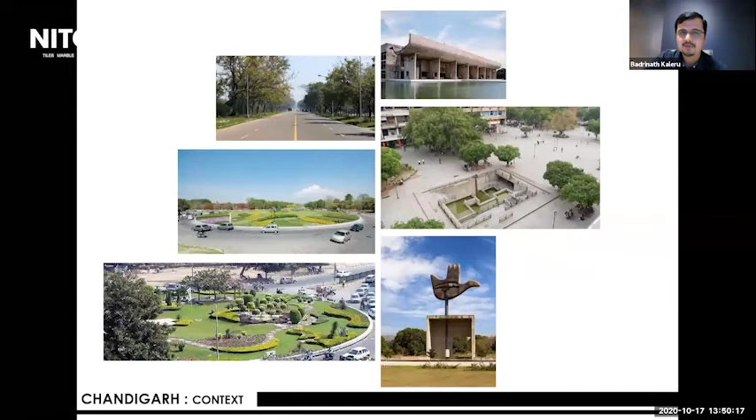So I'll just quickly flip to a couple of projects. This is a project in Chandigarh, it faces one of the predominant green belts. The whole idea was that the client actually bought the piece of land wherein he could look at different kinds of green belts around it, and fortunately there are 3-4 different parks around it.

So the site was located in such a way that they don't have neighbors, they have privacy from neighbors. So they wanted it to behave in a certain way that it's an extrovert house, not a standard urban introvert house. So it opens more towards outside than it contains itself.

One of the interesting discussions was they wanted a terrace, because the cityscape of Chandigarh is dominated by treetops, thanks to the great architect who did it. So he actually said that the best place to see the city should be from a certain height where we could see most of it and appreciate the greenery. So at that particular level, if we could have a terrace, that could be the main element of the house, and everything could be spaced around it.

There is some problem, I think it's moving.

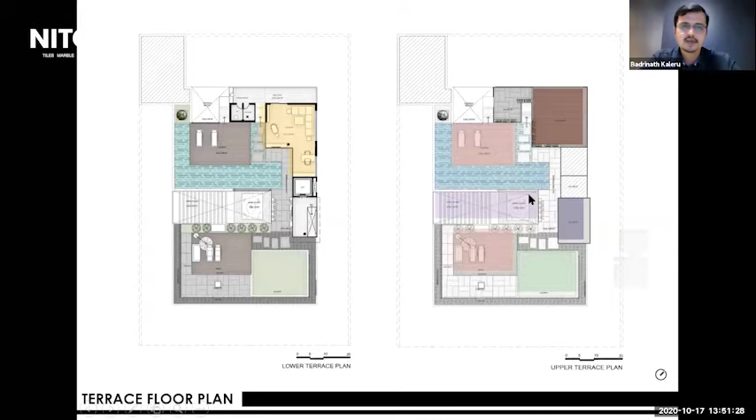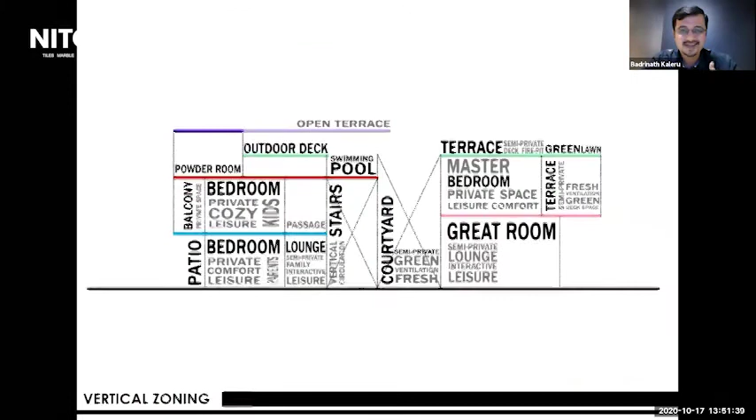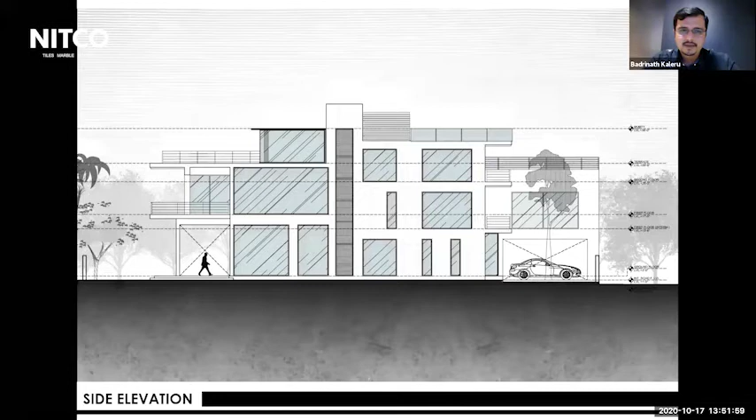So these are like how we could see that in most of the views, you could see how it looks towards outside. This is their existing trees in the backyard, with existing mature trees.

So how it blends into it, and how it brings in light and spaces, even private spaces like closet areas, have diffusion in it, and how they blend into each other. So if we only talk about the contextuality, it was more about making use of what is there in the neighborhood and trying to draw inspiration and evolve around it.

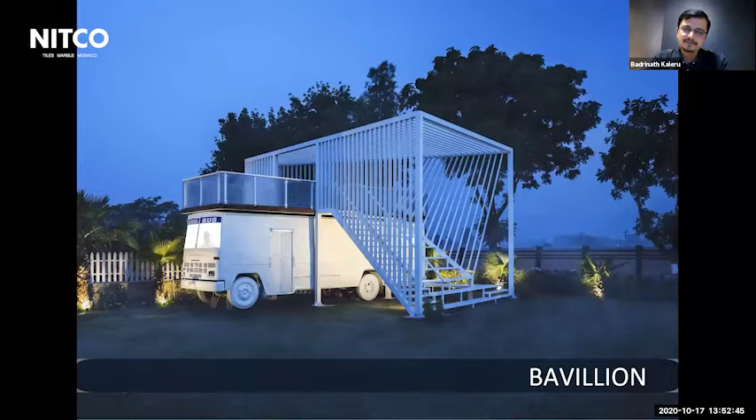There's another project I want to talk about. Normally we get briefs of different kinds, and sometimes briefs need not be programmatic, they can even be emotional.

This was an emotional brief, about a person who migrated from Chandigarh and shifted into a very remote village. He started a school 40 years ago, and 20 years after starting it, it was a time where they wanted to expand into the further neighborhood, where they had to bring in transport vehicles.

That is when his unfulfilled vision was left unfulfilled, as he passed away, and his daughter took over the school. Based on his insurance money, once he left, they bought their first bus. Today they have a fleet of around 100 buses and more than 4,000 students.

But even the first bus, which was purchased way back, they didn't want to send it for the mandatory disposal. They wanted it to have a good afterlife, something they could give back to the school.

It all started because we've been doing quite a lot of projects, and this was more of an emotional brief they gave us. We said, okay, let us do something which is peaceful, and it could bring back the vision, and it would be part of your school that could look back to it.

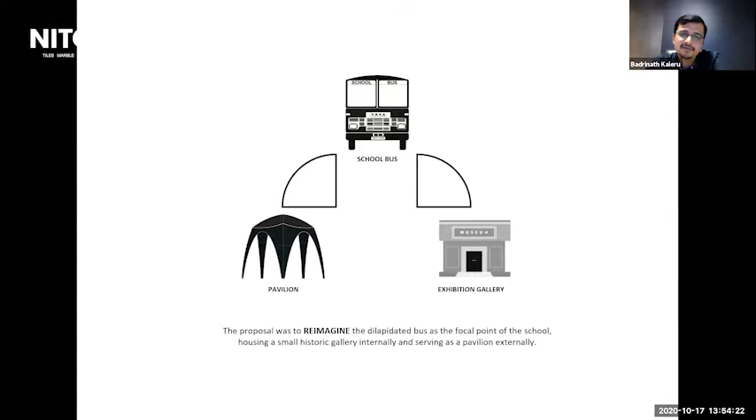So the idea was to convert the bus into a pavilion and museum gallery for the school, and how we could make them coexist so that we don't lose the originality of the bus, while at the same time using it for a broader purpose.

When we were working on the concept, we tried to encase it in a certain way, but we just wanted to keep the bus as the original. Also, the idea was associated with a bus from childhood, it was always an emotion that standing on top of a bus would be every child's dream.

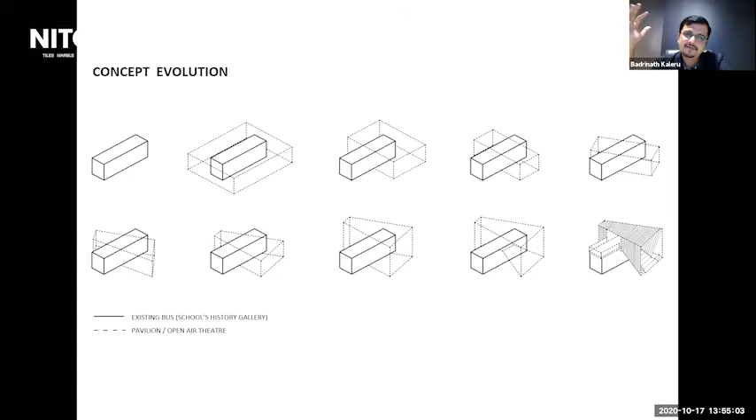It was set in a lawn, a very nice area where the neighborhood was lush green, with fields and everything, but they could not access it visually because of the high boundary walls and security issues. So this nice lift of around 10-12 feet would give you that horizon, a place where you could look beyond a standard perspective.

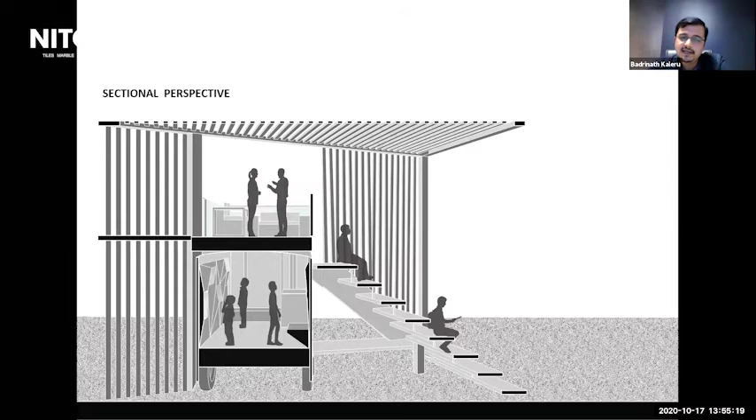So the afterlife of it was supposed to create a small open-air theater with a deck on top, and something inside which could be used more like an information center documenting the journey of the school. So it needed to be an open-air pavilion with a terrace and a knowledge center inside. The question was how could we expect so many things from a small bus, and what could be the possibilities?

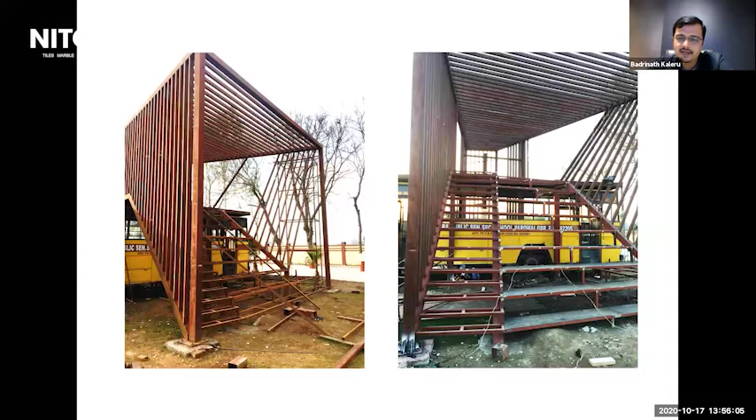The interesting part is the patterns it creates throughout the day - it looks very different at different times of the day, because the main element was the play of shadows, how they play into each other and interact.

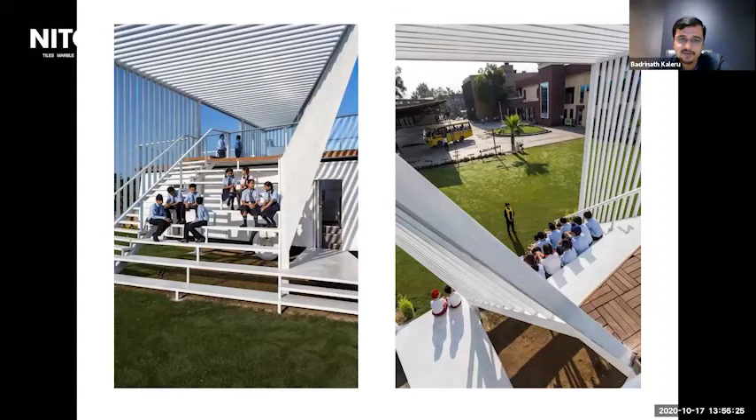The overall phenomenon was more like an open-air pavilion where students would actually want to go up. They spend most of their evenings there in a formal or informal way, and there are also a lot of formal things organized around it. There's a view where we could look through the horizon, something that goes beyond the boundaries, and how they make use of it.

So it's not something many people would relate to right away - they'd say it's a mere bus. But it was more about understanding the importance of it, and that's when we thought we could make something out of it.

It has been a phenomenal response - so many people have been visiting it, quite frequently. It's probably now the cover page image of the school. And even in this small environment, we still preserved the remnants of the bus driver's seat and the area next to it, so people could still relate it to what it was before.

I think that concludes my presentation. It is more about what we talk about as contextuality. The perspective here is that there could be different dimensions of perspective regarding contextuality, not just limited to the visual domain alone.

Love the presentation, Badri. So lucky to be living in a city like Chandigarh, where you have the trees and can step out on terraces and enjoy them. I love what you did with the bus - it was really super cool. I've never seen something like that before. Thank you. Use of a bus can be like this - we never thought something like this could be created from a bus. It's really wonderful, Badri. Thank you, Arunji.

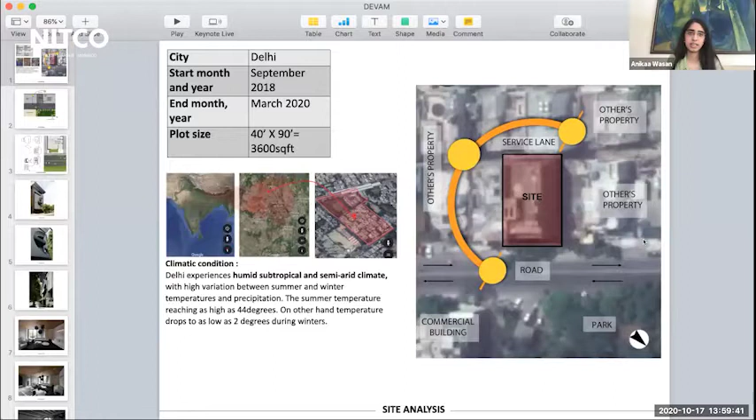I'm just presenting two of my projects. Is my screen visible? Yes, you are visible. Okay, so this is one of the residential projects in Delhi, in a densely populated area in Pitampura.

This is on a busy road, and we designed the shades that come out because of the context of the surroundings. Let me explain how I did this. The climate of Delhi touches extremes - in summers it goes up to 44, 45 degrees, and it drops down in winters to 2 degrees. So it's extreme conditions over here.

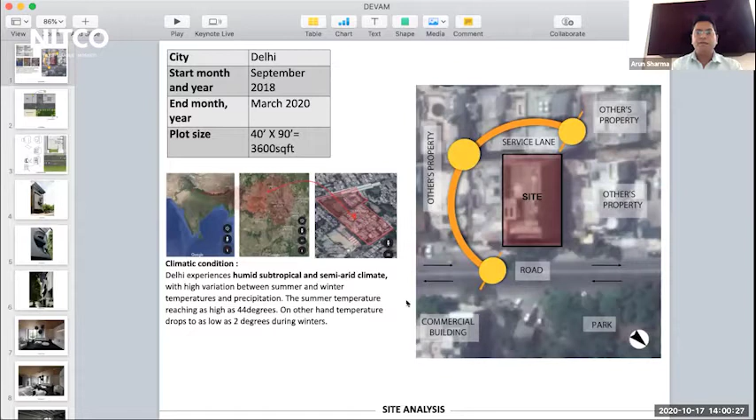This is the road, the busy road, and this is the site I was talking about, with residential property on both sides. Across the road there is a lush green park, and diagonally opposite there is a commercial building.

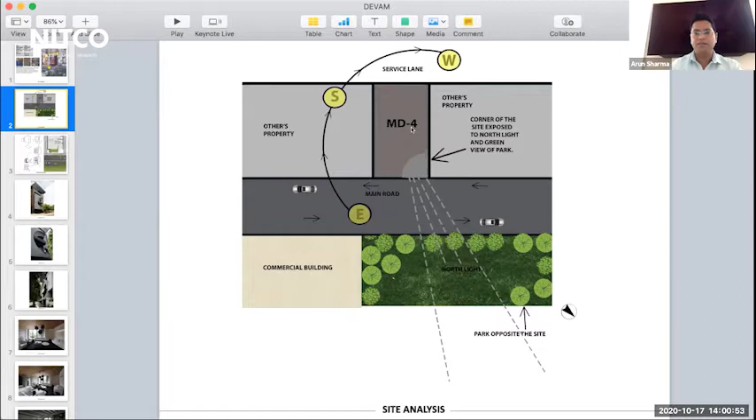The client and we didn't want to have the view of this commercial building from inside the interior areas. So what we did is create a thin partition wall in the balcony, and we tried to block the view of the commercial area so that we could have only the view of the green area from inside.

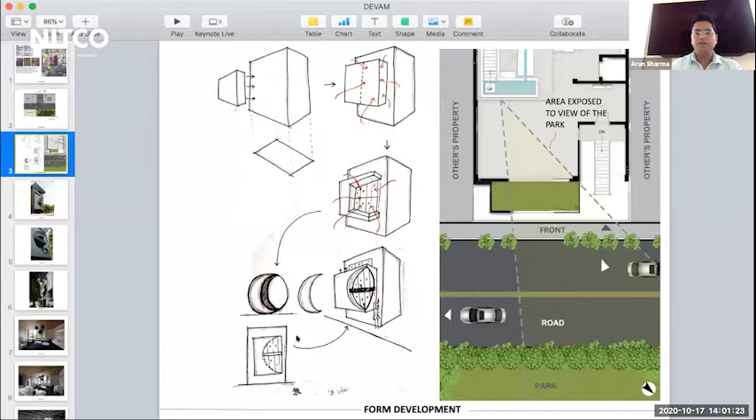In the starting, we blocked it out like this, and after joining these three points, we eventually came up with a curvilinear shape. This is how we arrived at this shape, and it came out like this - because of the requirement, and it came out beautifully. This is the second slide, you can see how the shapes came out.

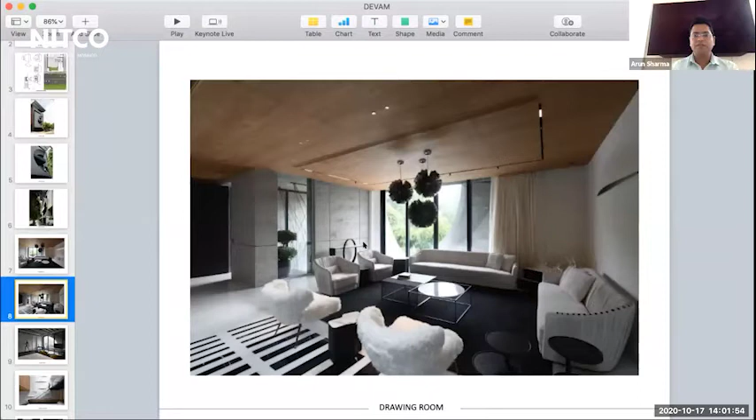From the inside also you can see the green area only, and not the commercial building across the road. So this is the formal sitting area, and from this area also you can see just the green part.

From inside the bedrooms also you have a beautiful view across the building. In the center, like we derived the curve shape for the front elevation, we took it all over the house. This curvilinear shape we took all around, on the wall, the same wall. So we extended the design in the formal sitting area, central atrium, bedroom, all over, the simple shape. This creates a very good harmony and a connect between the inside and outside.

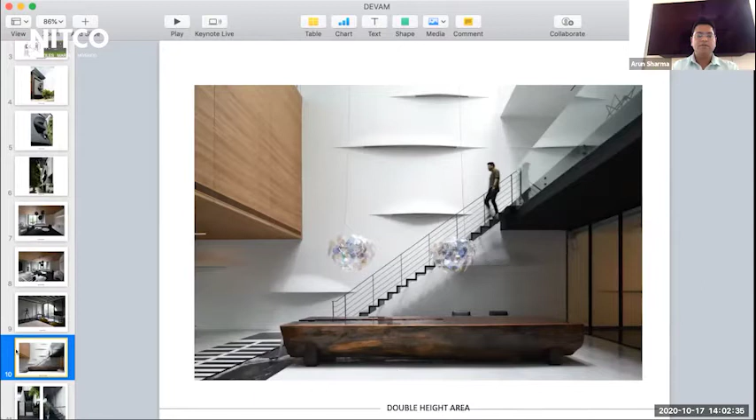This is the entrance of the Devam building. The name of the building is Devam, and this is an extended suspended staircase. In this we created direct entry, because on the left hand side, stilt is mandatory in Delhi. So the left hand side is for the car park and all, and we gave direct access to the upper ground floor from the stilt, from this staircase.

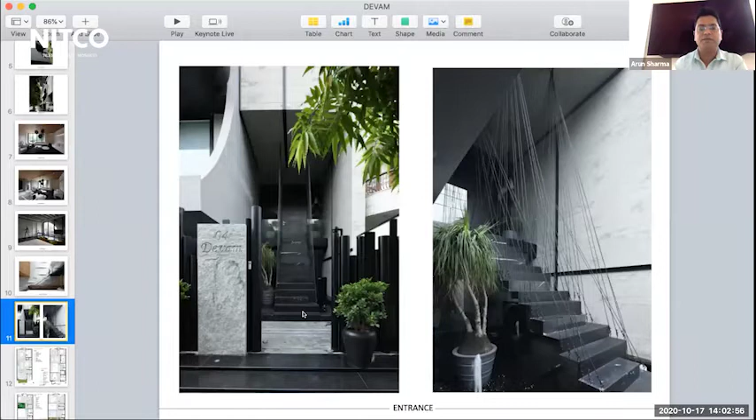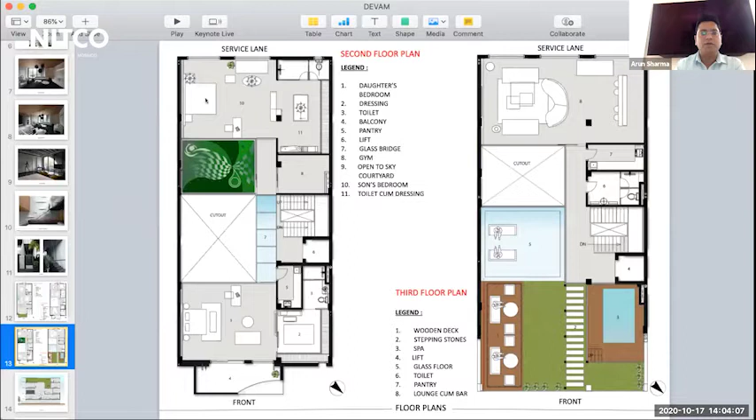The advantage we got from this is you can have the view from this bedroom of this courtyard. This courtyard serves two purposes: one, to have the view from this bedroom, and also because the cool air comes from the ground floor, upper ground floor area, and it goes up and exits through this courtyard. So it serves two purposes, creating a comparatively cool climate inside.

And you can see this curve shape we played with all over, which we took from the elevation block.

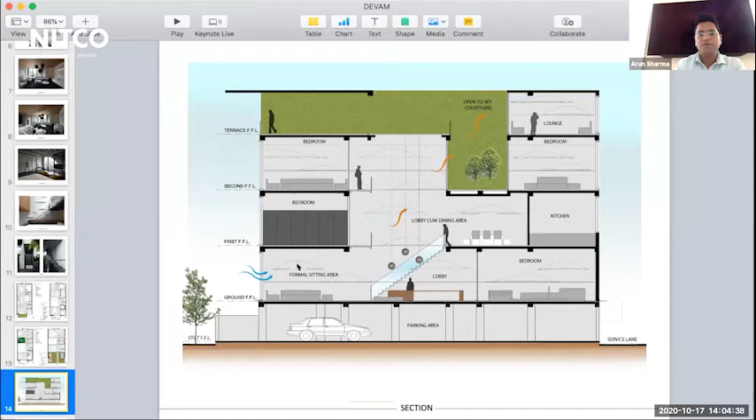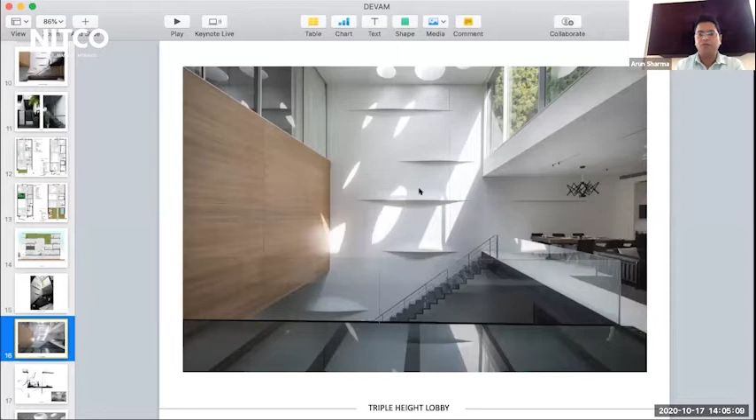These are a few pictures of the inside of the house, in which you can see that green courtyard I was talking about, and the whole area is flooded with natural light. There is no need to put on any artificial source of light anywhere in the house. We have ample natural light all over this house, although it is a property in between two residential plots. Still we have ample natural light from the skylights.

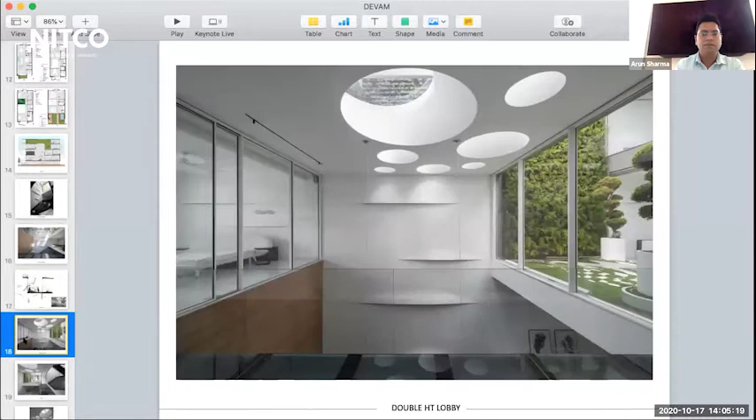This is the view we get from the rear bedroom. This is the view of the courtyard that we get from the rear bedroom. And this is the courtyard view.

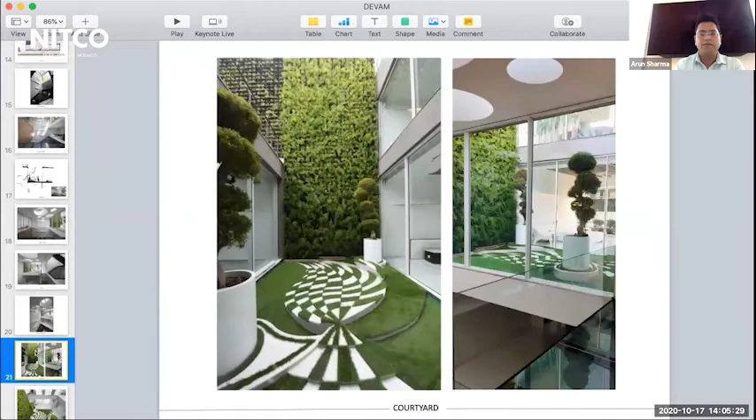From the rear side, this is the view from the rear side bedroom, which is at the back of the plot where the service lane is at the back, but still we can have a very good view of this courtyard. So you don't feel as if you're on the second floor with your room at the back side without any view of the green area. It entirely changes the scene of this bedroom.

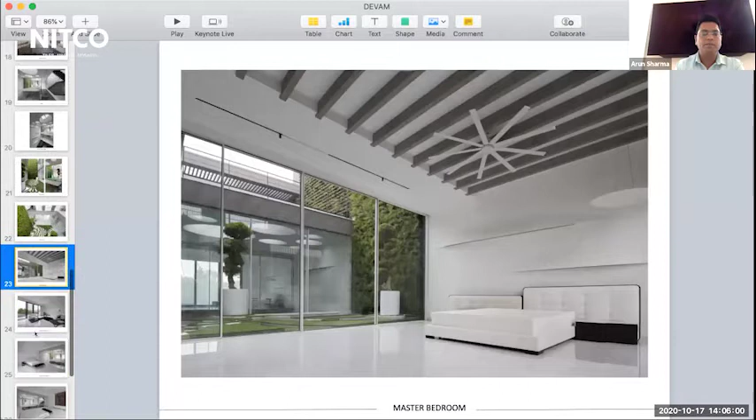And this is the bedroom in the front. So in the front bedroom also you can have that view of the central courtyard. So for this bedroom the advantage is that you can have the green area outside and also inside the house.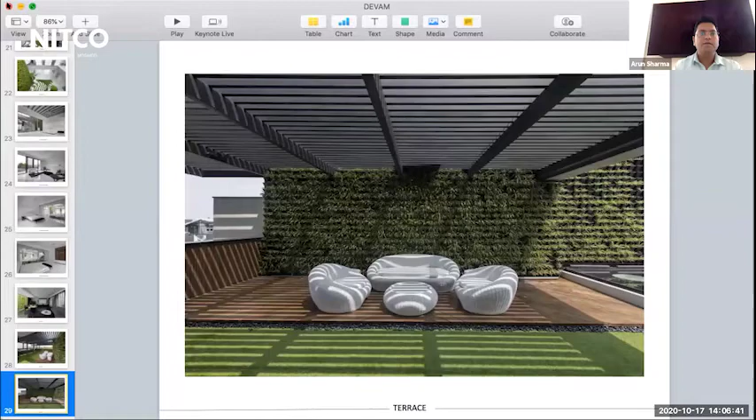And secondly, I want to share one more project, in the Delhi-Haryana border. I'm just opening that project, just a minute.

Yeah, is my screen visible? Yeah.

So this is what we did in the outskirts of Delhi, in Kundali. There's a lawn here, and the client gave this corner to create a sitting area, which is in the mid of the green area. They want to have the full green view of the entire landscape area. The direction is north, and at the back it's south.

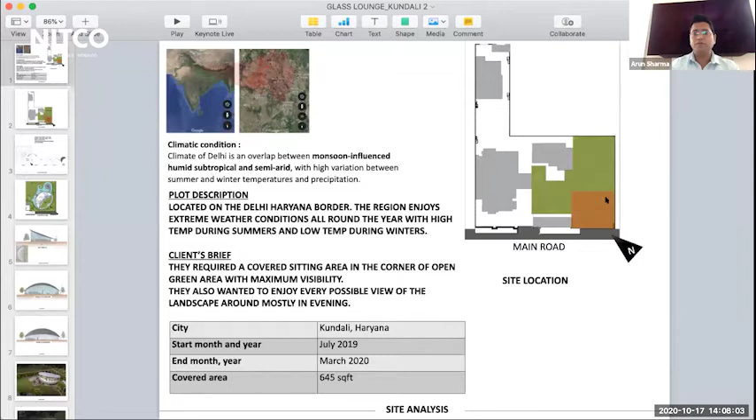So we got this corner space for a lounge and a green space. To have the maximum green area, first in the corner we did the diagonal thing, and then joining these two parts, we thought this shape would have the maximum surface area of the exterior. We did it like this, and finally we arrived on this shape.

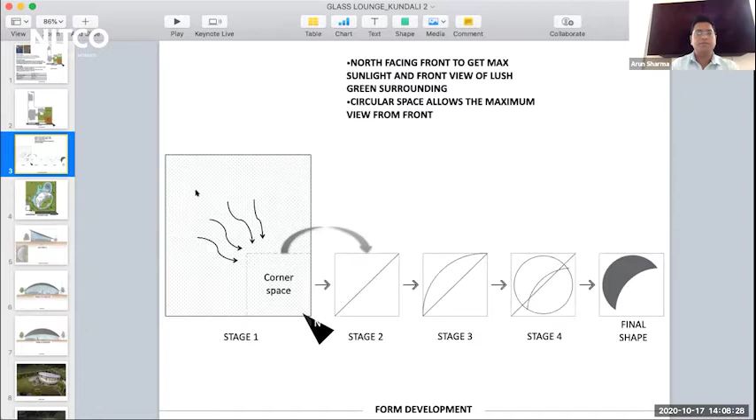And this is the layout plan. This is the sitting area, and it's all glass in this shape with landscape around. It's glass having two sitting areas with maximum exposure to the green spaces. We tilted it like this because this is the south direction, to cut the heat from the south, and we have the glass facing the north direction, so that we have maximum green view from this side.

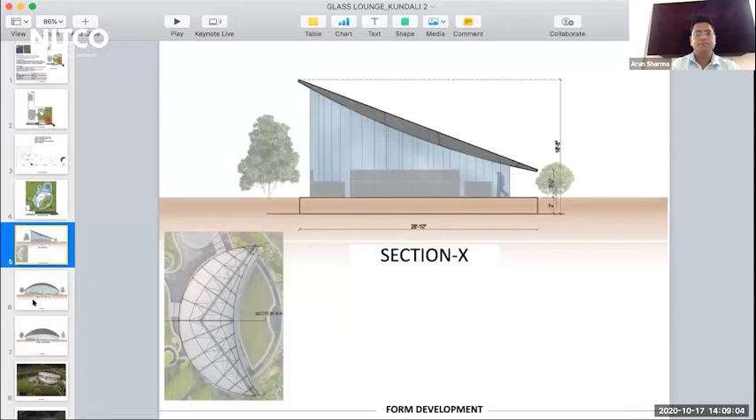So this is the front elevation. Finally, this has been achieved.

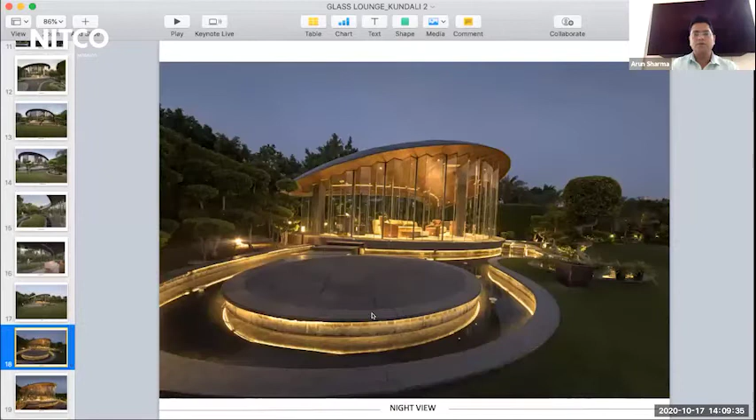So because of the site conditions and because of the requirements, we did this shape, and it comes out very well. Thank you so much, that's all.

Amazing presentation. I love the way that you can bring in a courtyard right in the middle of the house. It sounds like a fulcrum, a focal point for everybody to get natural light and greenery from it. Yes, that was the main thought behind that, so that the areas at the back of the plot also enjoy the greenery, and that never gets obsolete. This greenery and natural things never get obsolete, and always give a feel of freshness.

Yeah, because homes are touching each other on two sides, and at the back there's a small lane, I think a service lane. So there's no view at all. So you have to create the view within the house itself, and that's an amazing way of being able to do it. Thank you so much.

Thank you so much. This is a 400 square yard plot, 40 by 90 if I remember. Yes, it's 400 square yards. It doesn't feel like 400, it feels so much bigger. I think that's the miracle part of this design. It looks so much bigger, especially the atrium and the area around. Amazing, I think the amount of space you've been able to create is fabulous.

Visible? Yes. So, talking of context, I think it's not so much the context as to how we connect with the context. I wanted to speak very briefly about how we approach our projects. There are two very diverse examples I'm going to be presenting today, and I'll not take much of your time. So how context essentially enables us to connect our projects with what there is, and sometimes how context is to be interpreted will also vary from one project to the other. I'm Anand Sharma, Design Forum International is how we practice.

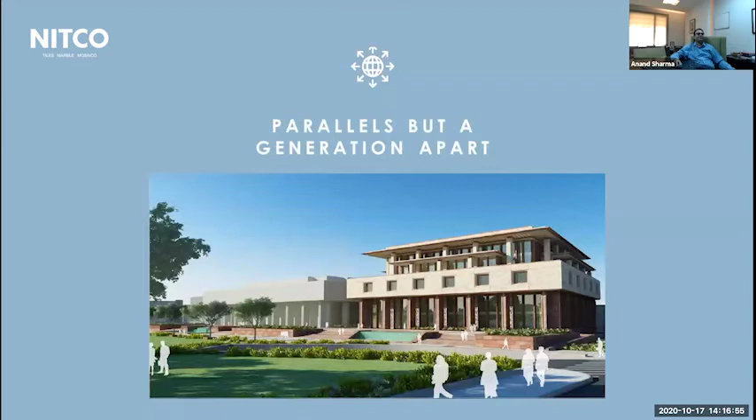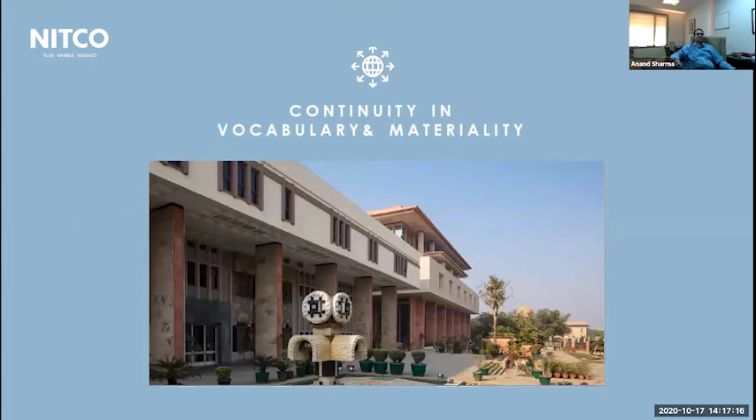So we chose to go with the materials which represent and speak the Delhi language, as well as try to give our silent tribute to the heritage of the buildings around us. We've eventually ended up creating a building which, in our own humble way, is parallel to the old High Court building. It's slightly larger, but has the same form, the same ethos, and the same appeal - we like to think so at least. So they are parallel in everything. We've tried to stay true to the vocabulary of the materials that were there originally, as well as in all buildings around it, the C-Hexagon of India Gate. So we've tried to stay true to vocabulary and to the materials so relevant to that area. This is exercise one.

The other exercise is a project still to come into public domain. The design is complete, but final investment board approvals are coming through, so it's not public yet. This is the civil airport terminal we're doing, which will be the second airport of Patna, Patliputra - some of you may be more familiar with that name.

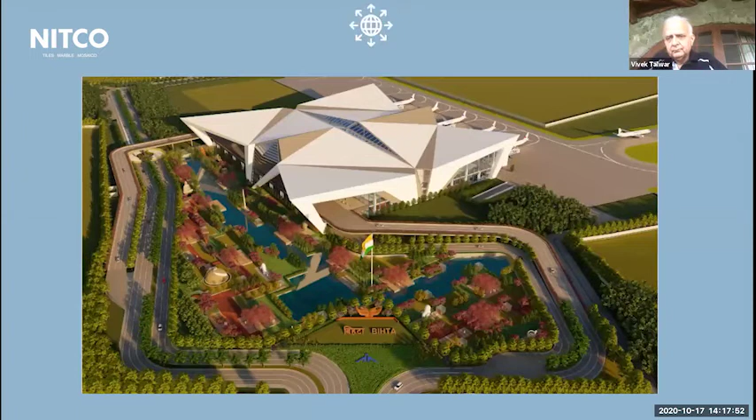Here we chose consciously to make a very clean departure from tradition in the form of the building, where the context came from the epitome of flying, the new poster boy of flying, the drone. So the form is modeled after a drone, but the foreground is modeled after the Ghats of Ganges, with the river of time flowing through it, and we've chosen to dot the entire foreground landscape with sculptures belonging to different eras of Magadh, Pataliputra. So we have tried to fuse two things.

But the reason we chose to make a clean break is context also varies from who's looking at it. So we asked ourselves: what is an airport for a resident? Somebody who belongs to Patna, what would he like to see in an airport? The airport has to be connected - it has to speak the language of that area for at least some part of it. Patna and Bihar, erstwhile Magadh, is so rich in heritage and art - there is Madhubani, Nalanda is 80 kilometers away, and the stupas are right there.

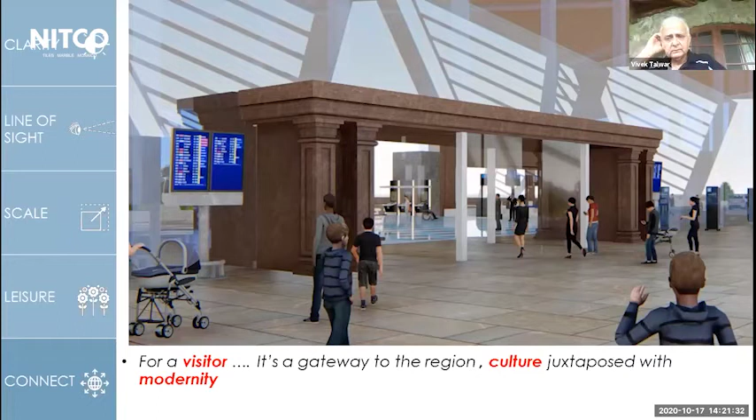But for a visitor, it is a gateway to the region. So we've made the gateways to the terminal building in the same form, same language, same vocabulary. So the culture, the local flavor of the place, is juxtaposed with the modernity of the airport building we're doing. Therein lies the balance between context and connect - what it means for a person who's a resident and what it means for a person who's a visitor. Thank you very much.

Have they been able to get the land? Because this is the only city in the country that doesn't have a new airport. When I land in Patna - I've been there by chance, I've been there a couple of times in the last few years.

You're amazed that 2 or 3 civil aviation ministers came from Bihar, and they don't have an airport. So the current airport they have is so constrained with land that they can't expand it further. Though they are making a terminal at the same location again, with the amount of traffic Patna is taking, they couldn't make it any bigger.

So we are creating this airport about 24 kilometers away. The area is called Bihta. There is an existing Air Force base there, so the runway exists and the control towers exist. This is the zone where most of the new development is coming up for Patna - the IIT Patna is being built there, and they're doing an 8-lane road. So the state government of Bihar has given 108 acres free of cost to the Airport Authority.

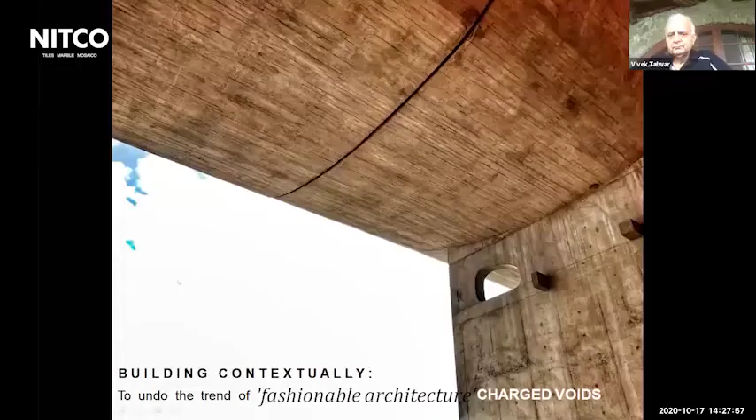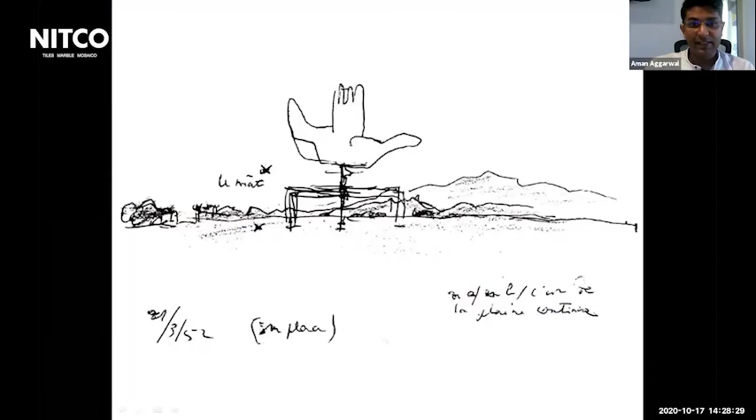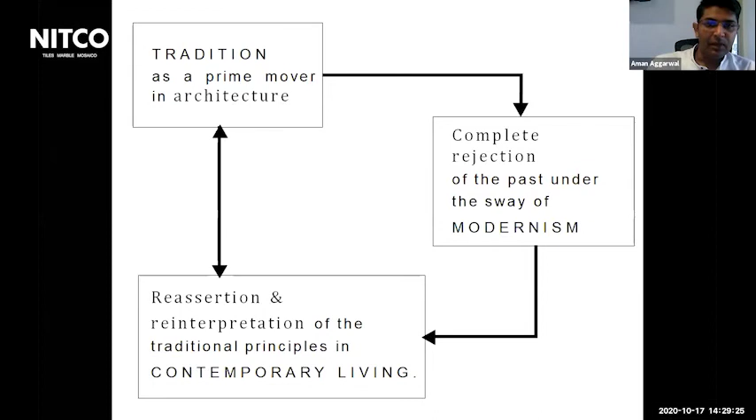So I'd share a couple of projects to talk about how architecture doesn't necessarily need to be a reflection of the time we are in, but sometimes becomes a criticism of the time we are in. How architecture, being a prime mover, can completely reject the past but can also reinterpret it. I'll share 2 projects to illustrate what I'm saying.

This is one of the residences we finished recently. If you look at it, the vocabulary is almost very Corbusian in nature. The idea was that there's so much happening in Chandigarh that I find completely out of place, so we decided to do something that states aspirations while still being a contextual project.

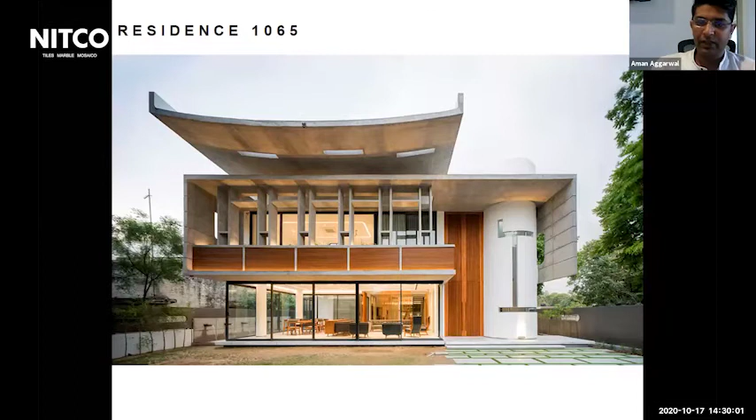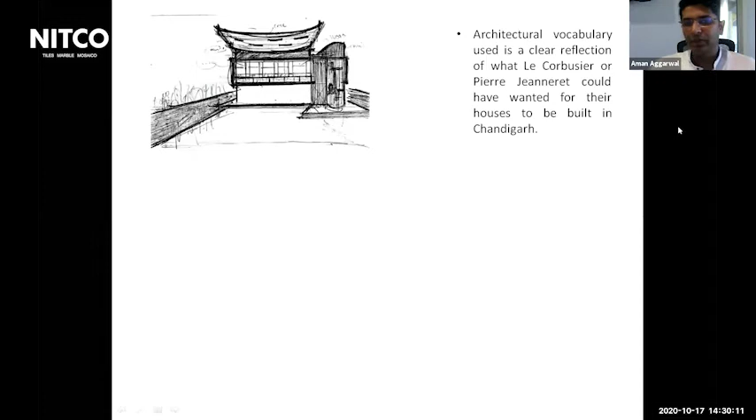This is the site of the project. I won't get into detail, but broadly the architecture vocabulary is Corbusian because of the context - it has the press club and other old buildings around the site. These are some sketches. It's contextual not just in vocabulary, but also because of elements Corbusier used - the sunbreakers, skylights, green terraces, and the overall open plan.

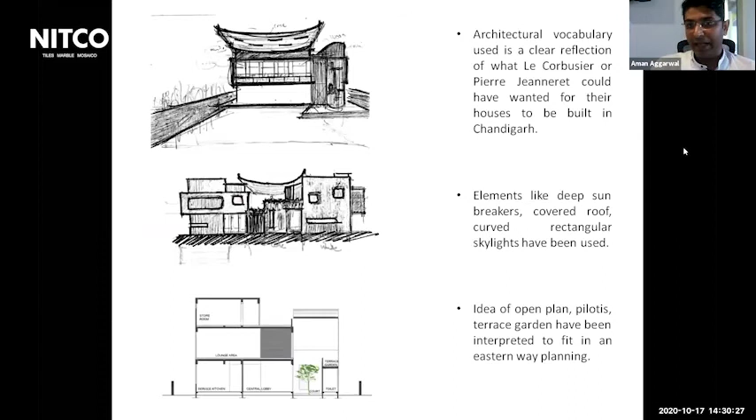So it's not just how the project looks, but also how it works - it's an open plan project. These are some other images. If you look at the plan, it's completely open, but it has 2 courtyards and terrace gardens. It's a reinterpretation of Western aesthetics with Eastern spatial planning, with courtyards inside, yet a completely free plan.

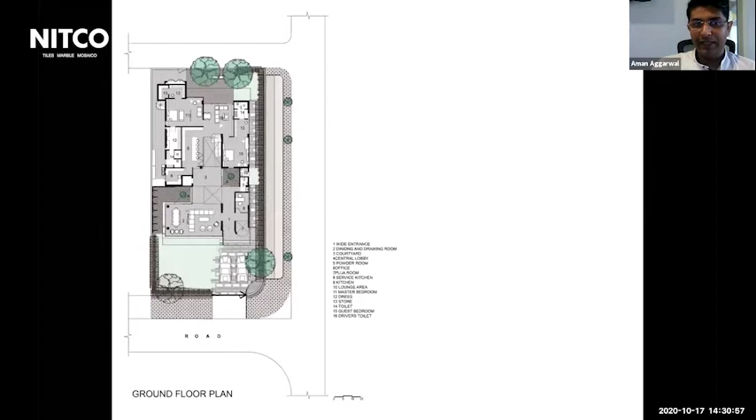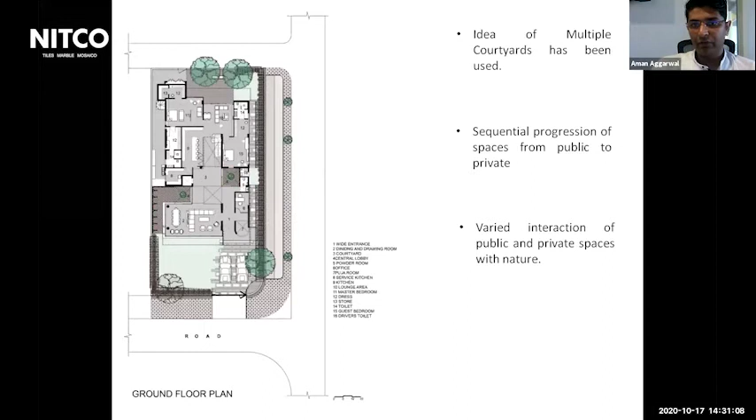The other elements of the sun shaders that Corbusier used. So the idea behind this project is it's not just contextual in how it looks, the architecture vocabulary, but also how it works. And more than that, how it is an interpretation of what probably somebody like Corbusier would have thought of doing in the city now, after 60 or 70 years.

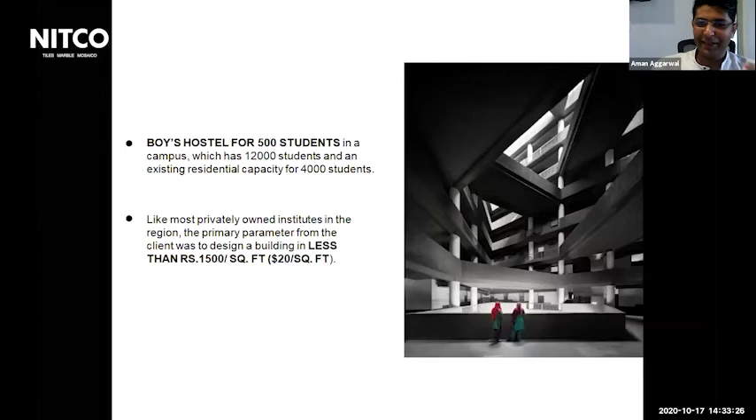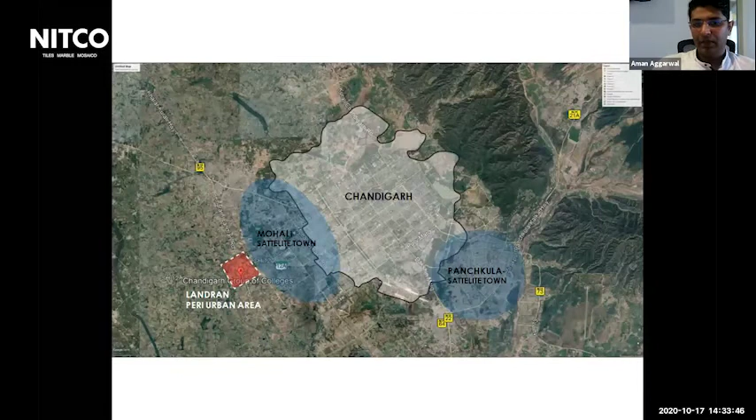But the actual brief was the budget, 1,500 rupees a square feet. That's the actual brief when you meet a client and understand what he wants. So the location of this project, again, Chandigarh is no more 50 square kilometers. It's become this huge urban development with peri-urban and suburban areas. So this is in the peri-urban area of Chandigarh, which is Landran, but the institute is called the Chandigarh Group of Colleges. That's the site.

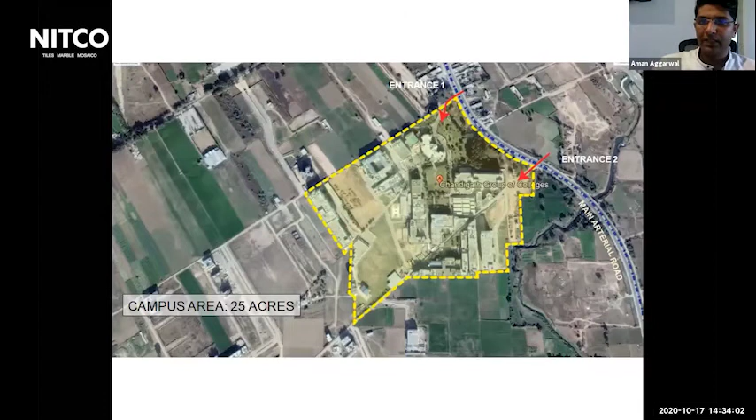It's located on one of the main arterial highways that connects or surrounds Chandigarh. If you're coming from Delhi to Punjab, this is the highway you take if you don't want to get into Chandigarh, so it's right on the highway. The campus is about 25 acres. But the problem with the campus is it's all gated compounds. They've created small gated compounds, staff quarters different, hostels different, for security reasons and other reasons.

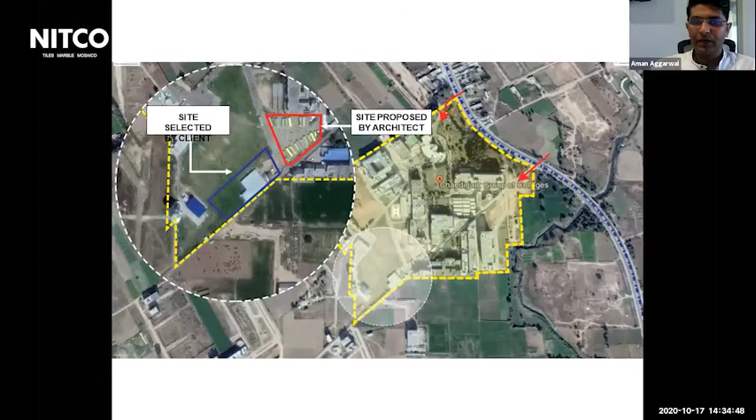And so this is the client. If you look at the site, this is the site the client had selected, and we decided to change the site. That's the first move we made. The reason was the client proposed a site on the side of a green area, and we wanted to save it. There was this piece of land which, according to the client, was completely waste because of its odd shape, an existing bus yard and transport yard. So we decided to build the hostel there instead of the actual site proposed by the client.

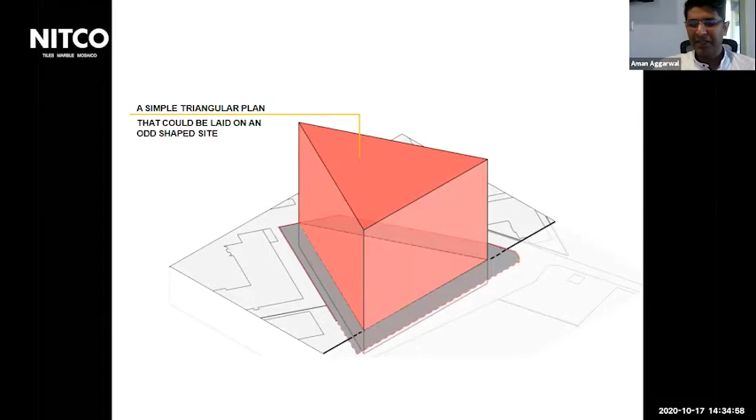So this is the design proposal. It's a simple triangular plan on an odd-shaped site. We stuck an atrium out of it, and pushed the lower floors back, because the principal idea was I wanted to create a public space. This campus had absolutely no covered public spaces. So the lower floors become the public space and the upper floors become the living spaces, because that's what the focus of the hostel should always be.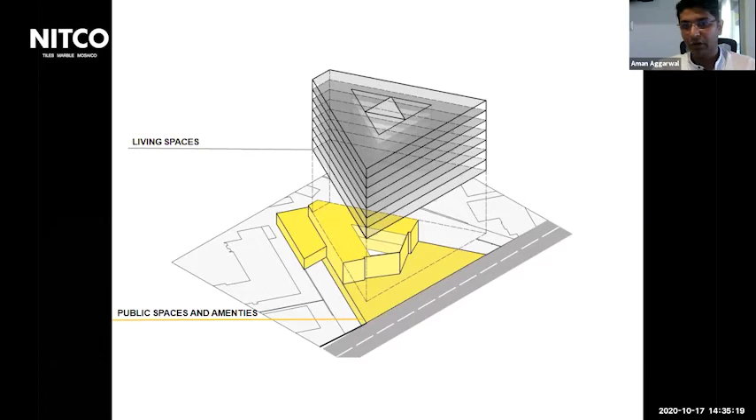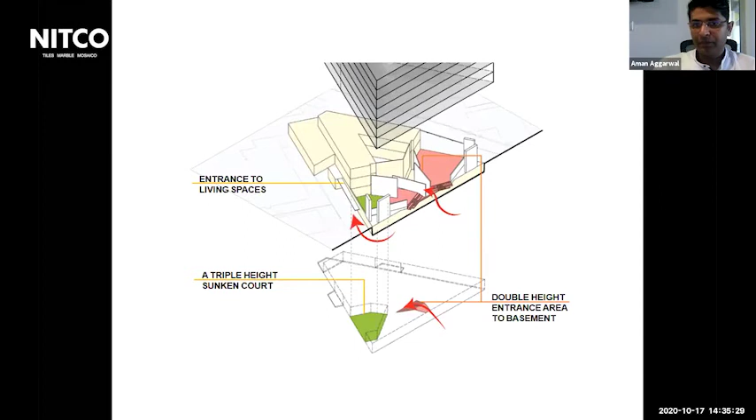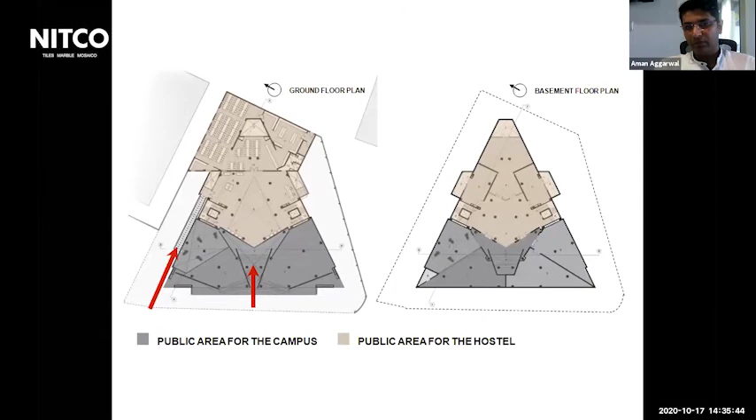But we also created more public space by sinking the front area into the basement, and we shifted the main entrance of the hostel to the side instead of the front. So some of the other details show how the public space functions. The real idea behind this project was, again, a simple geometrical form, with public space and private space at the back. It just shifts the entire focus of how a hostel can be designed, since a hostel is always thought of as a place which is locked at 9 o'clock at night, and things like that.

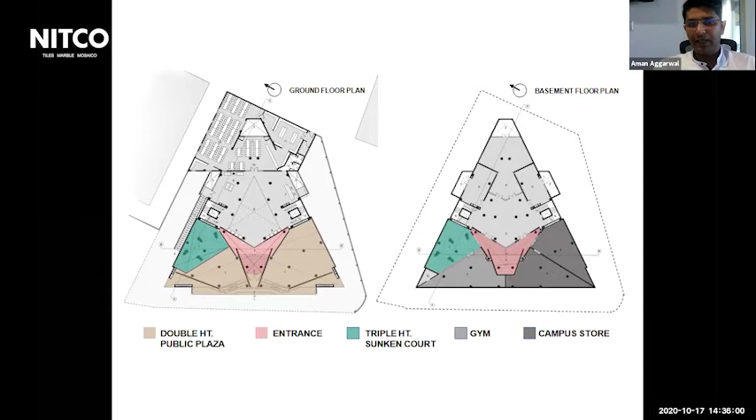It completely opens and gives a large public space to the campus. There's the main entrance from the side ramp, and the floor plan shows the ground floor is all public space with major seating areas and everything, while the first floor is the staff areas and other space.

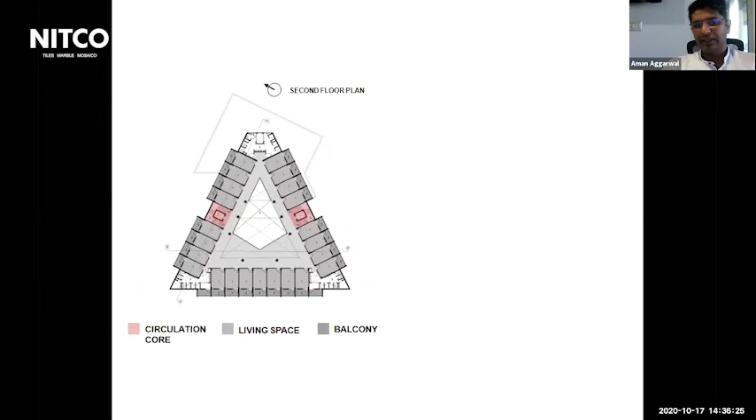This is how the hostel actually functions. It's a simple triangular plan, rooms all around, with toilet blocks at the end and balconies. Each room has a balcony.

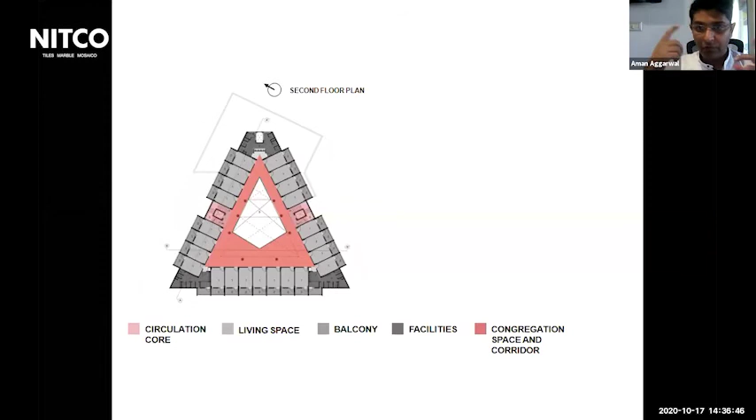But the real idea behind this public space was hostels, hospitals. We're so used to looking at these buildings as buildings guided by corridors. I wanted to create a space which almost feels like a space where one can saunter around. That freedom of movement that one can get inside a hostel is something that's completely missing in buildings. The essence is completely missing.

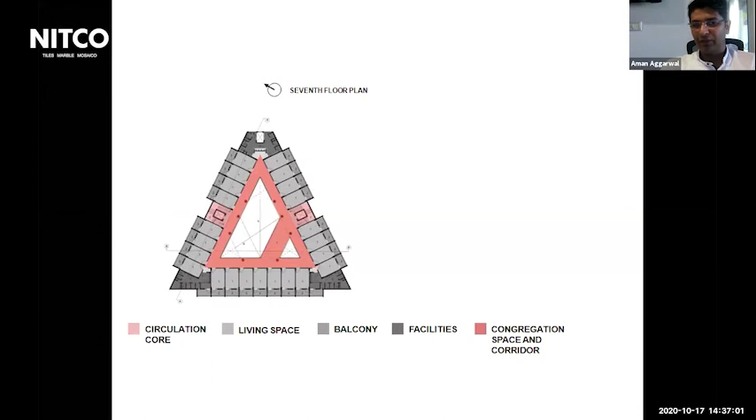So we have these connecting bridges in the central atrium. It's a very simple geometrical form. These bridges just keep on moving, but what it allows me to do is create a great interaction in the section.

Typical room, 3-story. This is how the building looks. It's a typical brutalist form. If you look back here, they have these typical Chandigarh balconies and everything, so I wanted to do something very simple, brutalist, but very Corbusian in nature.

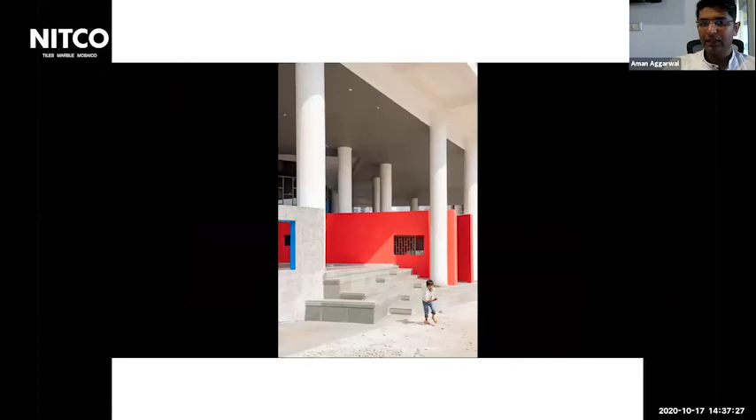And the result is right here. If you look at the building or the space inside, it's completely enigmatic. It really moves you the way the light comes inside. This is the public space, the staircase that goes to the lower floor, and this is the sunken court on the outside.

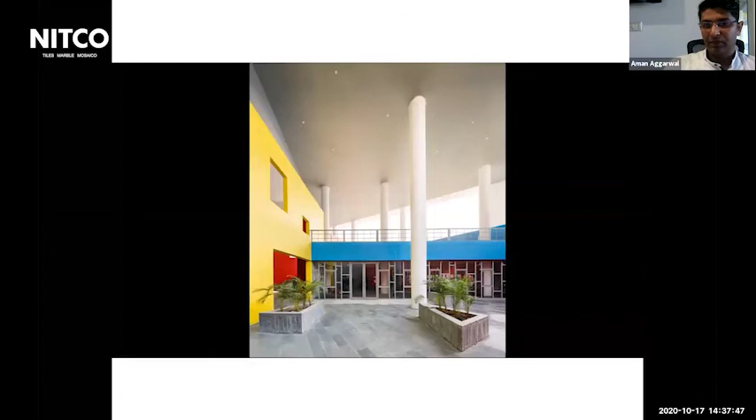This overlooks a beautiful gym on the basement, which is actually for the entire campus, not just for the hostel. So the gym looks outside, and all these public spaces are for the entire campus, not just the boys' hostel.

This is the actual entrance from where you enter. This is the central atrium on the lower floor. This is the basement actually, showing how direct sunlight just gets into the basement, the mess. And this is the actual atrium.

This is how the hostel feels. It doesn't look like a hostel from the inside. It has natural light all the time. It works really, really well climatologically.

It's just that the sheer quality of that light that falls inside, and how you connect through different spaces, and how these bridges are actually congregation spaces for students to hang around. I've seen students playing cricket, doing all that stuff. It's a really interesting public space. It's about creating a public space in the living space of student hostels.

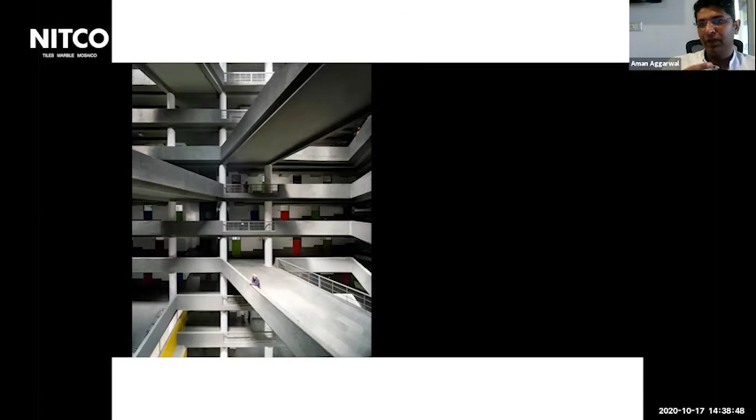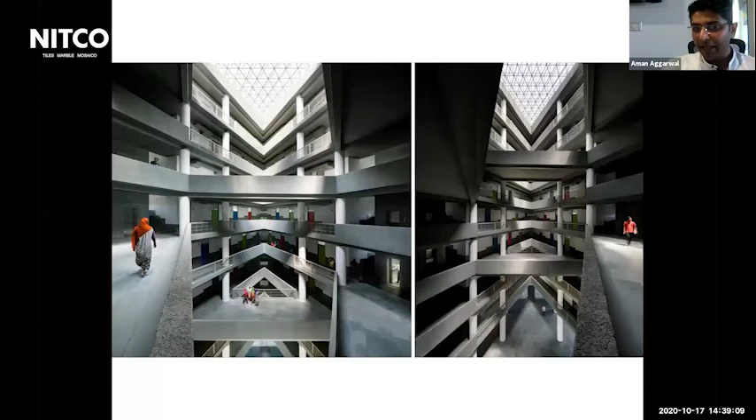And the best part about the space is it has so much variety. Every time you move inside a space you get lost because you see something completely different, and with time everything changes. How light moves in, everything changes, and your angles of vision keep on changing. You can walk down to the same place in probably 6 different ways.

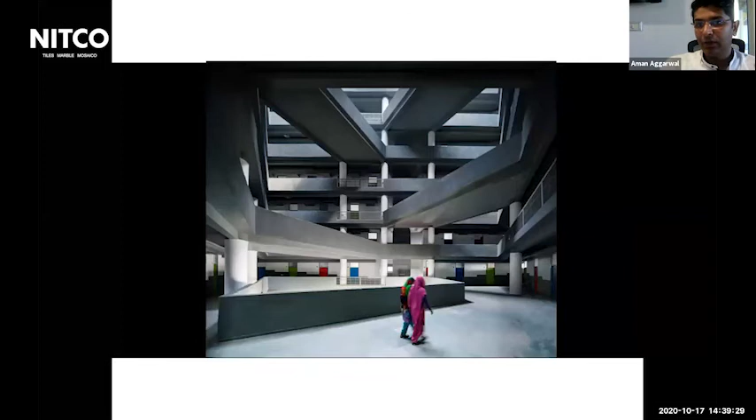So it is this essence that Corbusier had, this essence of architecture where he could understand light, and he could understand space, and he could understand how. This is how a typical room is, and this is how the balconies function, and the other shots of the atrium.

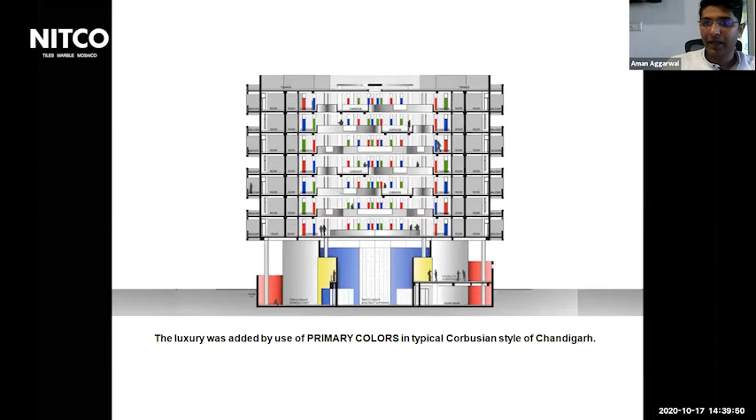I won't get into the details of efficiency, but yeah, this project is really, really climatically responsive. Materials are very, very simple, and the primary colors are always Corbusian in nature. This is what Corbusier used to bring, his idea. So this is what I would like to say in the end.

The city of Chandigarh is planned to a human scale. It puts us in touch with the infinite cosmos and nature, provides us with places and buildings for all human activities by which all citizens can live a full and harmonious life. Here, the radiance of nature and heart are within our reach. This is the essence of Corbusier, that we are chasing in 2 of our projects, and I was trying to sort of portray. Thank you.

Amazing. True tribute, I would say. Great. Thanks. Excellent.

We'll be able to see each other.

And the hostel site is an odd shaped site, about 1 acre, a little less, little more than 1 acre. Oh, the campus of the college is 25 acres. The whole campus is 25 acres. Some courage, no? You having the client shift the site of the hostel from one place to another.